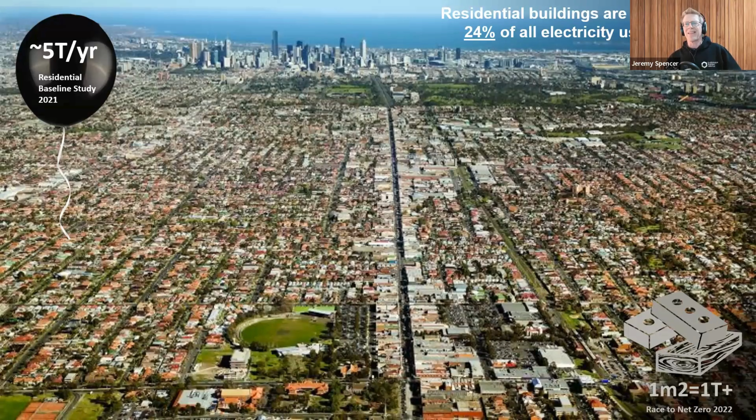All right. Apart from carbon, the other impact that our home has, it has a big impact on our electricity grid. How energy efficient the performance of the homes is has a big impact, because as you see there, residential buildings are responsible for 24% of all electricity used in Australia. That means how we build makes an impact on that percentage.

And remember that we're currently aiming for about 200,000 new residences every year. It's not quite reaching that at the moment, something like 170,000 or so, I believe, but that's what the government's aiming for. But that means within 5 or 6 years, we've added another 1 million homes. So that 24% is only likely to grow. And this at a time when we're trying to do this energy transition. We certainly don't want the next 1 million homes to be as high demand as the last 1 million homes.

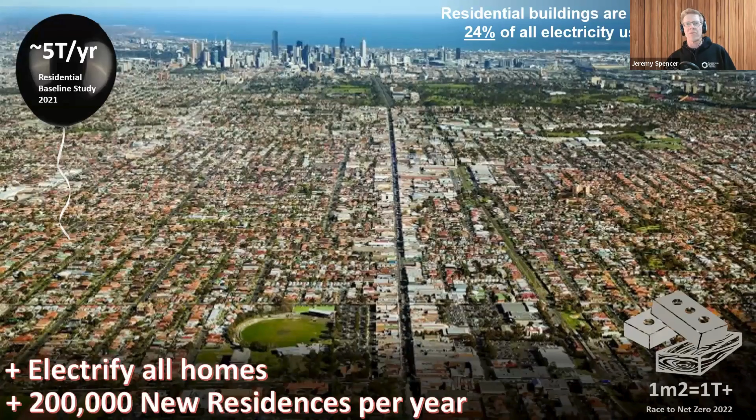Remember, we've got to provide infrastructure for this new green grid. And if we don't want it to cost an absolute bomb, we have to keep the demand down of what we're putting onto that infrastructure. And don't forget, not only for new homes, we're trying to electrify all homes. And this is coming in the next 10 years as the government pushes towards a 2035 target of 62% carbon reductions on 2005 levels. On top of all new homes, we're also trying to electrify all businesses.

On top of all businesses, we're trying to electrify all industry. On top of that, we're trying to electrify all transport. And we're doing this because if we can put these things onto an ever-greening grid, the carbon emissions of Australia go down if we can green that grid. So that's the logic to it.

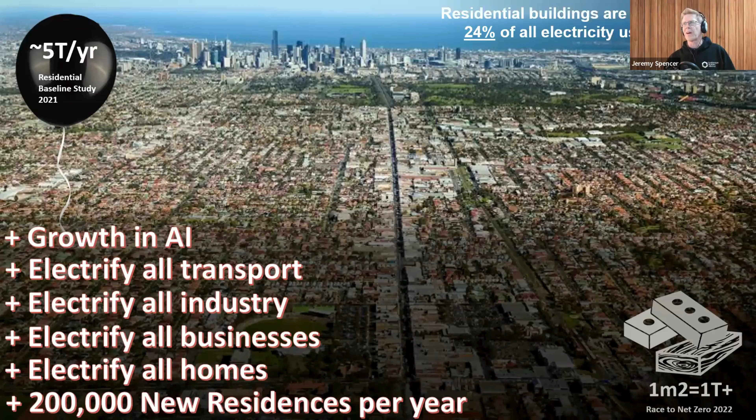And on top of that, of course, we now have AI. Already about 5% of our electricity use in Australia goes towards AI, and that's set to double by 2030. So there's a lot of pressure on this grid. This is already a grid under pressure, and we're trying to do this energy transition. So what I'm proposing is that our homes need to align with this ambition for Australia, and not only need to align with it, they need to not be a burden on the grid and support the energy transition.

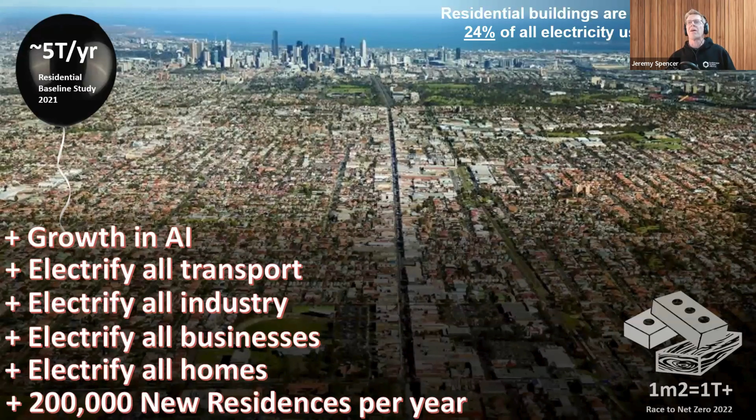Okay, this is also partly what the code is already trying to do, and there's a really useful document. If you haven't read it, it's called the Trajectory for Low Energy Buildings. That's the document that drives the energy efficiency measures in the National Construction Code, and it's the document that is responsible for us having 7 stars and whole of home in the NCC now.

I won't go through it completely, but this trajectory goes until 2030. There's actually a new Trajectory for Low Energy Buildings, an updated version, which you should also get and have a read. When you read that to see where sustainability is going over the next 10 years, you will see the words embodied carbon written a lot in that document. So just a heads up there.

But this current trajectory has 2030 as its endpoint, and by 2030, it's aiming that all buildings, residential and commercial, be zero energy and carbon ready. And if I just read out what that means, a zero energy and carbon ready building has an energy efficient thermal shell and appliances, has sufficiently low energy use, and has the relevant setup so they are ready to achieve net zero energy use and carbon if they are combined with renewable or decarbonised energy systems on-site or off-site.

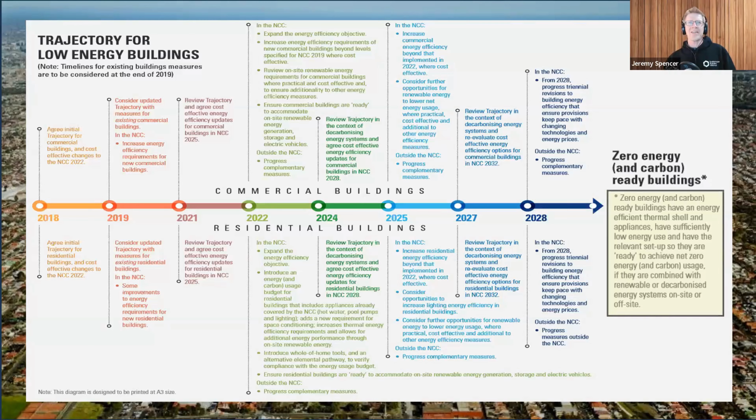So effectively, that's an energy efficient thermal shell, reasonably energy efficient appliances, such that if you put photovoltaics on the roof, you will get an annual net zero outcome. Now, I've been pushing for this for years, and I found it amazing when this got into the code. A lot of people were pushing hard for this, but I've now come to think that annual net zero has some issues and maybe isn't what we should be aiming for.

Let's have a look at what most net zero homes who achieve that annual net zero, producing as much power over the year as they use, are actually achieving. So here we have a graph of annual net zero. Hang on, I'm just going to move something that's on my screen out of the way.

This graph is for a 7-star home built to perform to that rating in Canberra with inefficient appliances and a 7 kilowatt PV system. You get a similar graph if it was a 7-star home maybe not built to 7 stars, maybe built to 6 or 5 stars with a mixture of efficient and inefficient appliances. You get a similar sort of outcome.

But if I just explain this graph, at the bottom you can see in that aqua blue is hot water. Under NatHERS that stays pretty constant all year, similar requirements all year round for hot water. Above that, we've got household appliances. These are plug-in loads, and NatHERS again just assumes that they stay pretty constant all year. Then in summer in Canberra, there's a little bit of cooling required. That's the blue there. And then you can see that there's quite a lot of heating required, and this is with inefficient heating as well.

This yellow line here is the solar being produced from the 7 kilowatt system on the roof. If I just colour that in, you'll see this is what people generally mean by annual net zero. They mean that the power that's produced by your solar over the year, if you add all that area under the curve, is pretty similar to that area of demand that the house needs. Once you get those the same, effectively, you get annual net zero.

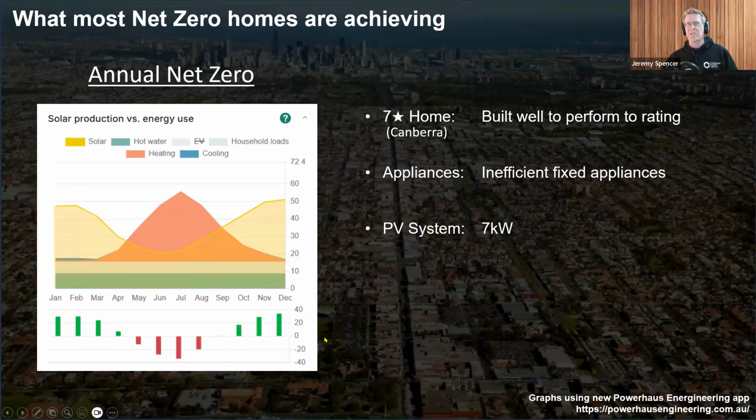What's the problem with this? In warmer months, the house produces more power than it needs, but only during the day when sellback prices are very marginal. Hot water and household loads remain high, and they're often on at night when demand is high and prices are high. So you're producing a lot of power, but you're not getting much financial return typically for it. And you're still drawing power at night.

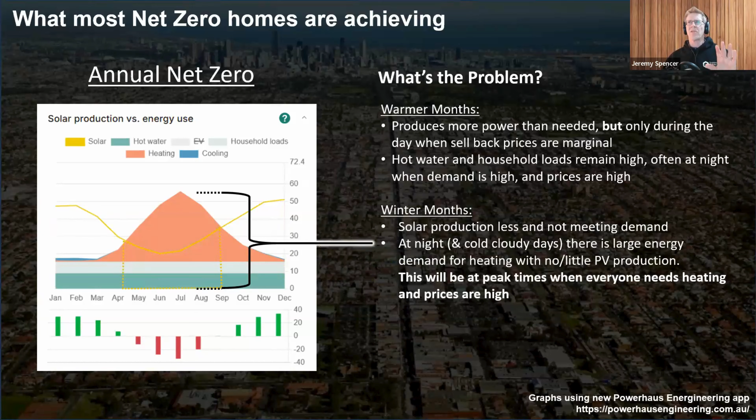Winter months. Solar production is less and not meeting demand when you need it. At night and on cloudy days, there's a large demand for heating and little or no PV production. This will be at peak times when everyone needs the heating and the prices are high. So what does this lead to? Even though you've achieved annual net zero, the house is still expensive to run. You're drawing most of the energy that you need at peak times when those prices are high.

And even if this house had a battery, that would be pretty useful for those summer months. But this house is not making enough power in winter when it really needs it to fill that battery. That is, its demand is outstripping the solar resource.

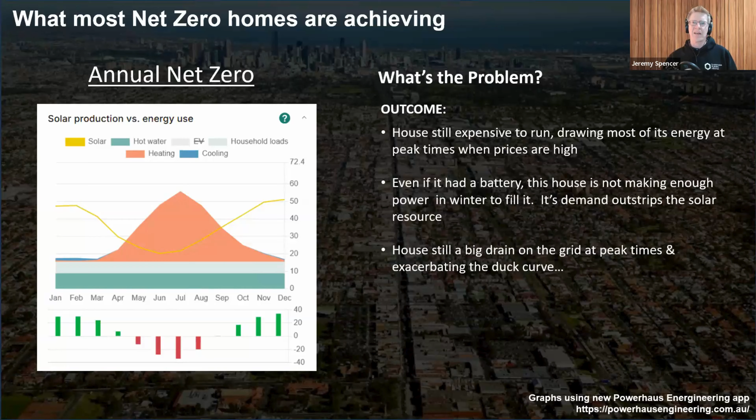And such a house, even though it's net zero, even though it's better than a standard home, it's still a big drain on the grid at peak times and is exacerbating the duck curve. What is the duck curve?

In the morning, people wake up, no sun shining, it's dark, or at least it is for builders when they wake up. Turn on the appliances, maybe have a shower, cook breakfast. You get this high demand spike early in the day. People go off to work, sun comes out, a lot of renewables come into the grid, fossil fuels back off a little bit, and the price goes down because there's often a lot more power in the grid than is needed. It really drives those prices low.

And one thing you have to know about the national electricity market is it likes to try and have even prices, unlike these big ups and downs. In fact, prices can potentially become negative, and that is bad for the stability of the grid, which is why if you're now putting in solar panels in Victoria, at least where I work, they will have a curtailment ability on them so that utility providers can turn off the power going into the grid if it's becoming a little bit unstable.

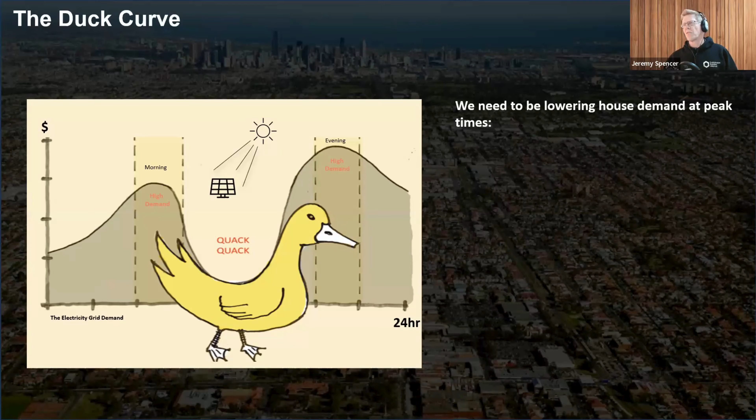So to lower demand at peak times, we need to do these things. Minimize heating and cooling loads by focusing on good design and good construction. So we are back to a shell first sort of idea here. Choose efficient appliances, cut that inherent demand of the house so it's not adding too much at those high demand periods. Then we need to make use of this resource of all this sunshine and shift what we can to midday hours.

So hot water would be one. Hot water uses a lot of energy. Let's try and make that hot water in the middle of the day when we have all these renewables in the grid and the carbon intensity of it is very low. Of course, if you have solar on your roof, you'll be producing a lot of power in the middle of the day typically, especially in those summer months. Let's put it into hot water.

When you get an electric vehicle, or even when you're building new homes, you should be setting up now for EVs. When owners get them, they can put them onto the middle of the day, again, to soak up that energy resource there. Pool pumps, if you've got a pool, make sure it's got a timer on it to work in the middle of the day. Appliances as well. You can talk to owners potentially about considering when the sun is out, that's the time to do the washing or wash the dishes or so forth.

Once you've minimized demand, load shifted things to the middle of the day, then the next step would be to put in batteries. And the idea of putting in batteries is to get this solar resource from the middle and start shifting it to those high demand periods. So of course, a house battery, and most of you will be familiar that there's a federal 30% rebate or 33% rebate, I think, on batteries at the moment. So a house battery is good.

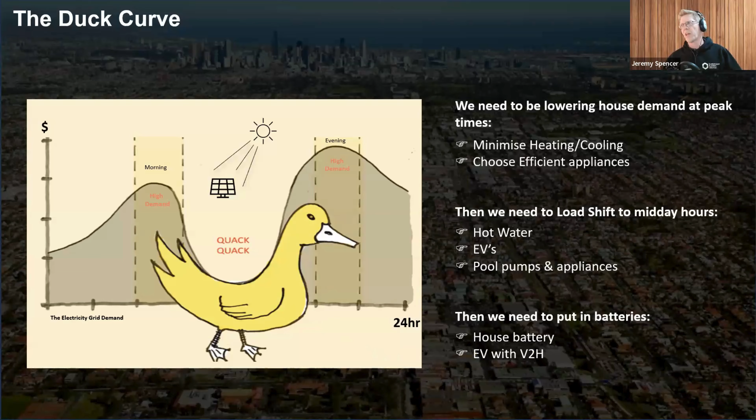EVs with vehicle to house technology will be coming within the next 5 years. The protocols are already set. Some of them are already starting to hit the market. That's where your car effectively becomes the house battery at night. Car batteries are typically at least 3 times bigger than the normal house batteries you see on the side of the wall, than your Teslas and so forth.

And for the government, I'd like to see them making more use of this resource, bringing on local and regional storage batteries that can then supply those high demand periods later on. And in particular, I think this is a no-brainer idea: make EV charging very cheap, if not free, in the middle of the day. It will promote more EVs being sold. People can then charge their cars in the middle of the day, come home, plug them into their houses, and run their houses at night. That's where I'd hope things could potentially go.

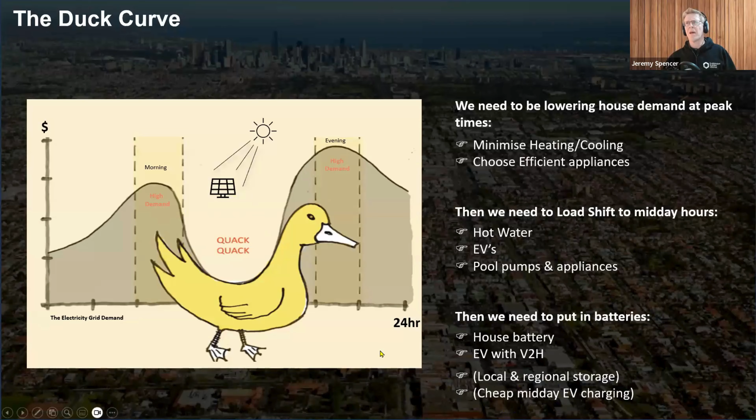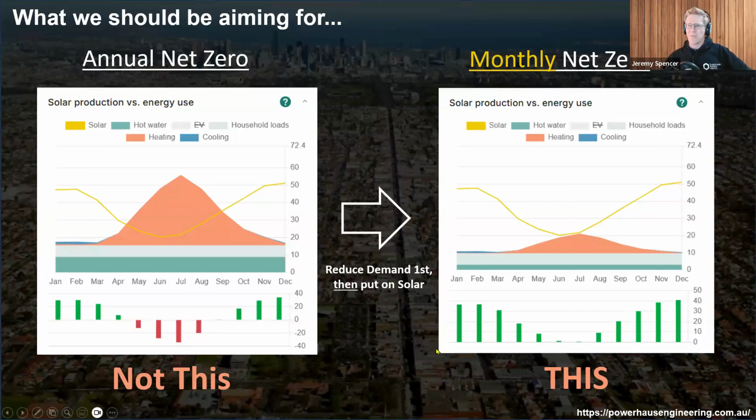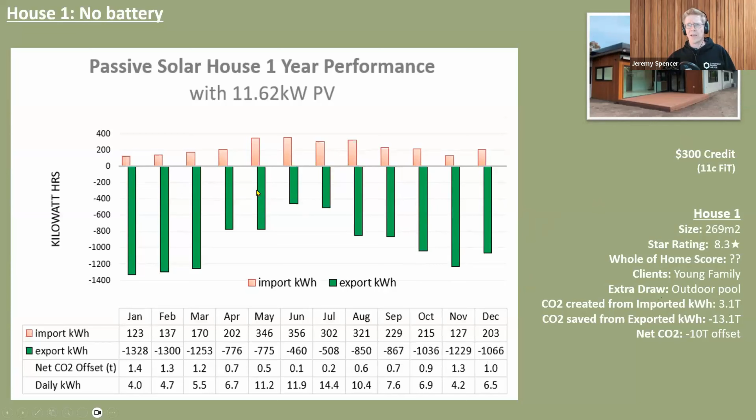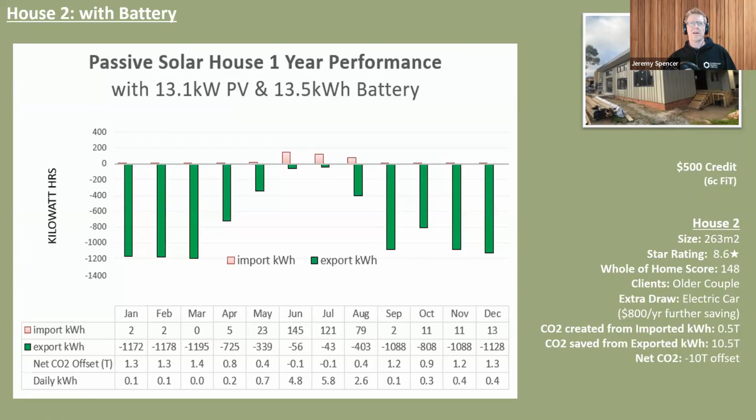But why is this good? It's good because when you combine it with battery, you get something like this. Here's another house. This one's $500 in credit, slightly bigger PV system, similar floor plan, similar house size to the other one. This one has an elderly couple. They spend most of their time during the day in the house. Their extra draw is an electric car, so they charge the electric car. So not only are they $500 in credit each year, but they're also another $800 ahead from charging their car at home instead of buying petrol for it. And the house is all electric, so there's another $300 ahead from not having a gas meter connected on the home.

But I just want to point out a couple of items about this house. For those people who've seen the webinar about this house, I have shown this before, but I think it's important. You can see here above the line, for most months of the year, there's effectively no power draw at all, extremely low demand. You could have another million of these homes on the grid and you'd hardly have to change any infrastructure because they've got extremely low demand. So I'm calling this a very resilient home.

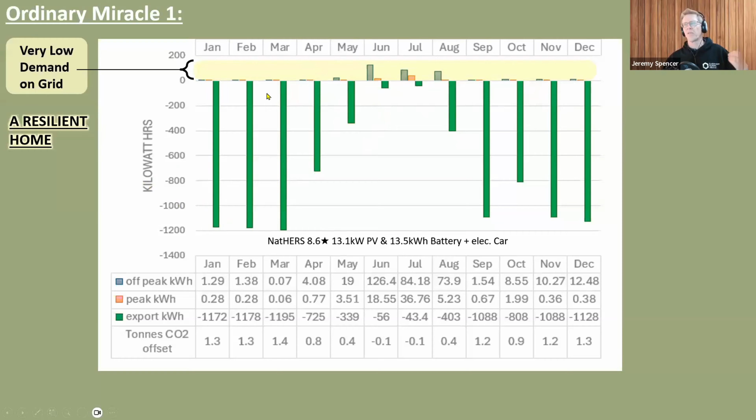Why is it resilient? It's resilient because if there's a blackout, this house could go days, weeks, potentially months at a time offline. Potentially the whole year if the owners manage the middle of the year period a little bit, because it's drawing a little bit more than it's producing there, but not very much. So you get these really resilient outcomes, assuming you choose a photovoltaic system with islanding on it and the battery.

These green lines show all the power that's being sent out to the grid, and it translates to enough power for 2 equivalent performance homes. And this power is being sent to the grid not only during the day when it's being made, but it's also being sent to the grid by the batteries at night, and could be set up to send at those peak periods to support the grid at those high demand times, to give more resilience to the whole grid infrastructure.

And you can imagine as well that if this house was in the country somewhere, and God forbid there was a fire, forest fire, and hopefully if this house didn't get burnt down, potentially this house could be supplying power with power cords to neighbouring homes, charging electric vehicles and pumps and different odds and ends. So this was also an energy hub, this house that has gone on the grid. As I said, these are real figures.

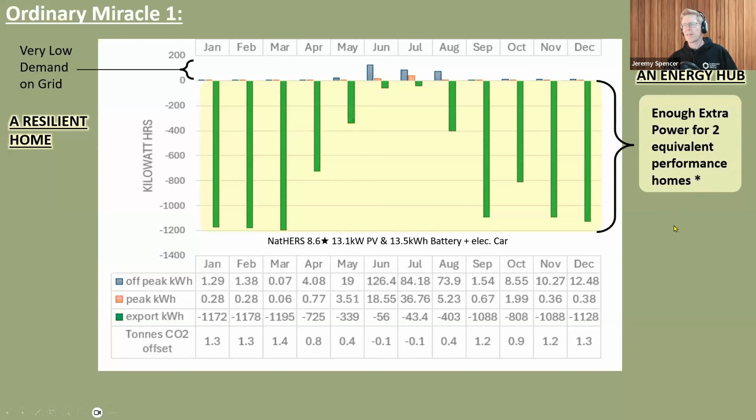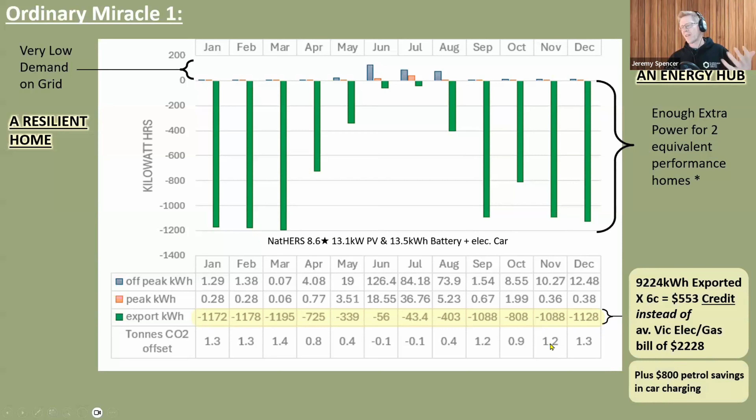This house exported over that 12-month period 9,224 kilowatt hours. That's how it gained its credit instead of paying the average dual fuel bill for a Victorian home, 2,228. Like I said, it's $800 of saving in petrol, another $300 for not having gas. So this is a low cost living lifestyle if you get a monthly net zero outcome plus a battery.

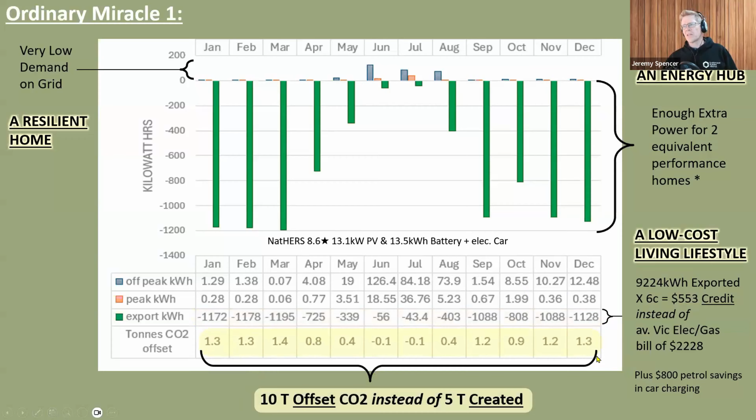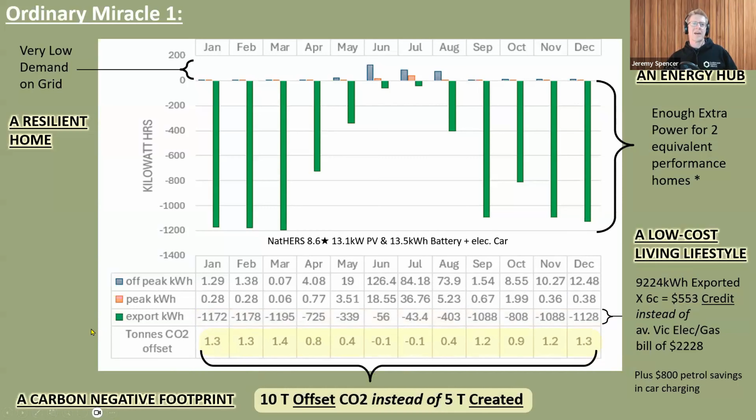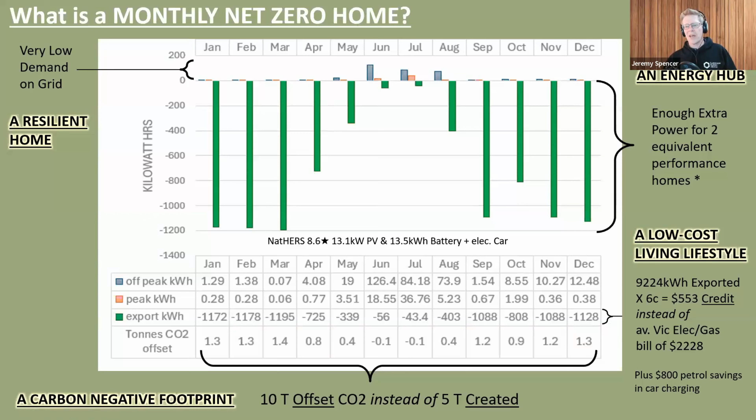And all those kilowatt hours that are sent to the grid offset the need for fossil fuels to be burnt to provide that power, and that saves 10 tonnes of carbon going into the atmosphere instead of the average of creating 5 tonnes. So you get a carbon negative footprint. So when people ask me what is a monthly net zero home, I say it's a resilient home, it's an energy hub, low cost living lifestyle, a carbon negative footprint, and something that helps with the green transition, a grid-friendly home, let's call it that.

If you want to know more about that particular home, you can go to our webinar resource. We're now up to our 41st webinar for SBA, and you can find just about all of them here. And if you click on that one, you can find out what made that house tick. There's also a part 2 that looks at the embodied carbon. This was a true zero home, which also accounts for embodied carbon.

All right, how do we achieve monthly net zero outcomes? So what do you need to know to achieve those sorts of outcomes? Well, the good news is all the information resides on the Sustainable Builders Alliance website. You click on the roadmap tab and you'll see that there's 5 different steps on the roadmap to achieving net zero and true zero outcomes. And those 5 steps are: good design is step number 1. Design a home that in the first instance doesn't need much energy to heat and cool, because the climate does it for it with the good design.

Step 2, low impact material selection. Build the house with lower carbon, more sustainable materials. Step 3, performance construction. Build it on the ground to perform to its energy rating. Step 4 is efficient appliance selection. Fit it with efficient hot water, heating, lighting, cooking, and appliances, so that it has minimal demand. And the last step then is energy generation and offsetting. Provide enough on-site energy generation for net zero and true zero outcomes. So that's the 5 steps to a true zero carbon home.

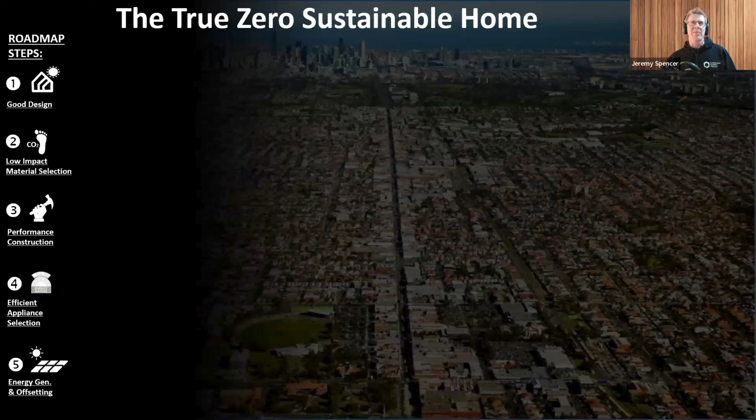In this talk, like I said, we're just talking about operational energy. So we're just going to talk about net zero sustainable outcomes. And what I want to do now is just give you that overview, that high vision look at how to actually achieve this, and then some pointers and some guides on what you need to know and where those resources are so that you can get up to speed quickly and start producing homes that do exactly this. By the way, when I'm talking about net zero from here, I'm really talking about monthly net zero.

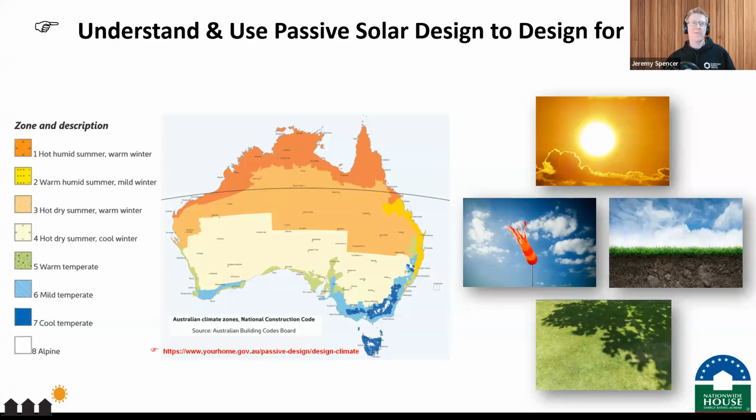All right, now what does the designer who's doing the design for the house need to know? Well, simply they need to understand and be able to use passive solar design. These are age-old principles that people have been working with for thousands of years to basically allow the climate to do the heavy lifting in keeping the temperatures comfortable inside a home.

How to find out what the passive solar principles are? If you click on good design, you will go to step 1, and step 1 lists out the 5 rules of passive solar design. If you click on each one of those, you can read through practical information of what the rules are and how to apply them on builds. Wherever you are in Australia, there's different strategies, obviously, for tropical versus cooler regions.

Now, one thing that I want to point out here, if you haven't already looked at it, is the 7-star plus cheat sheet. That's a free resource to download. And some of you may not realize, but as well as a builder, I'm a long-time thermal performance assessor. I've rated literally over 1,000 buildings over my last 20 years. Some of them are mine, most of them aren't. And I've also spoken with a lot of raters over that time and good friends around Australia.

So what I've done in this cheat sheet is basically put down all the learnings under the 5 different principles of passive solar design, of things to check on your plans. And this is a really good way to assess whether the plans you're doing are on track. But also, if you're not all that familiar with passive solar design, it's a really good way to get up to speed. Read through it. Anything that you're not sure about, there's actually links in this document back to the right part of the website, to have a read and gain that understanding. So a useful resource for getting up and running on how to achieve 7 and beyond.

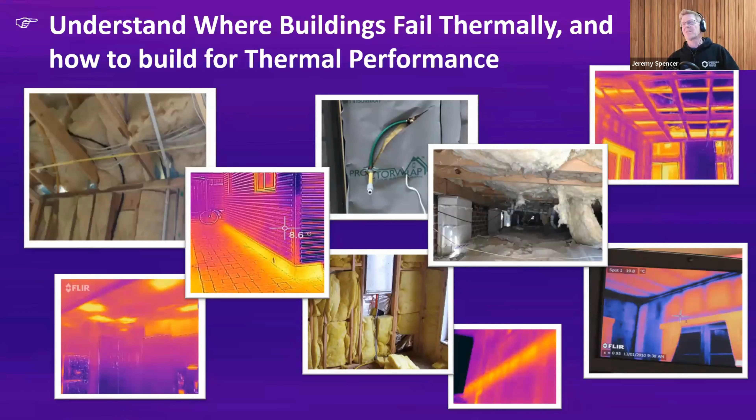Step 3 of the SBA website goes through what you need to know, what the assumptions are and what you're actually aiming for. It also has a lot of information about condensation and mold in performance construction, which is a hot topic at the moment. So that'll give you a good background on the theory and practice of minimizing condensation and mold, and also a discussion of different strategies for healthy indoor air quality.

But this is what I want to point out. It's the builder's thermal performance checklist. This goes through all the areas in standard construction where it commonly fails. Those are the pitfalls. And then it has 2 strategies. One, particularly for designers, are things that you can do to design out issues from the start in the design so they don't come up. And then for builders, it's got control measures for each of those pitfalls, and it's got pictures and explains what's going on in the picture. These are control measures so the builder can check things on site and control them before moving on to the next stage of the build.

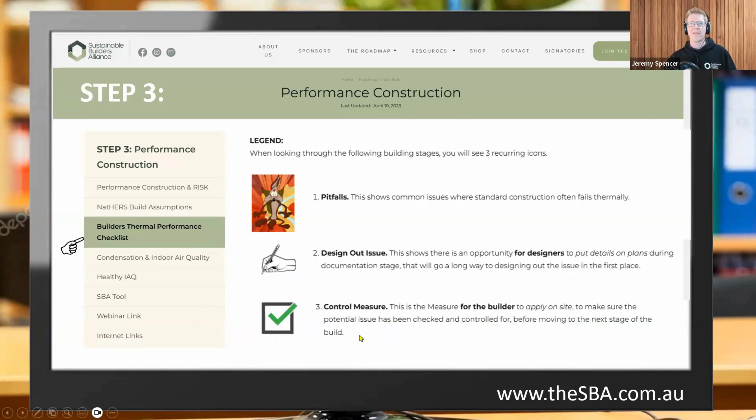To go with this information, there is an SBA tool that is free to download, free to the industry. And this, I think, is a really useful document. For builders, as we're moving into a period of high performance construction, especially if we're promising net zero and true zero sort of outcomes, it's important that we have a strategy so we can ensure the thermal quality of our builds time and time again. And that's where a QA checklist really comes into its own. It also acts as a bit of a risk management tool in that you can show all the things that you did on the build to achieve the performance outcome.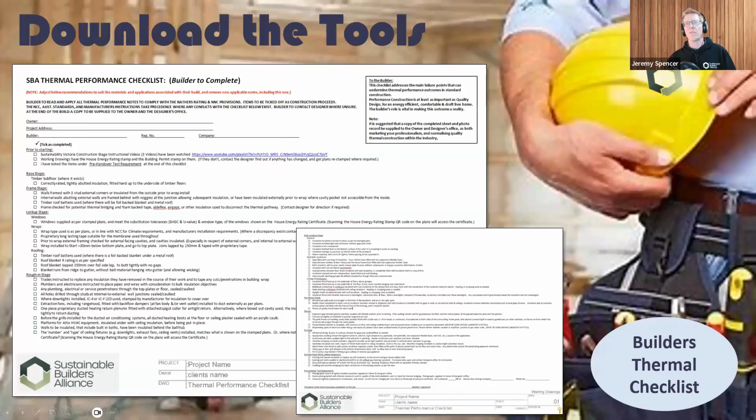You can give it to your project manager, someone on site, and it's really just simple little things to check at each stage of construction, because with standard construction, if you miss things early on, if you don't get the insulation right before the plaster goes on, well, you've missed your opportunity. If you don't caulk the plaster before the cabinetry goes on, you can never get to those gaps and cracks. This will help make it more likely that the builder and the team on site will be able to control for potential issues.

And if you're wanting a builder who knows this stuff, or a designer who knows how to do climatic design, good design, or you're wanting an assessor or a trade who is on board and talking the same language, we have now introduced something called the Sustainable Builders Directory. So you can go and look up members who are on that. And if you're a builder looking for a high performance designer to link up with, because you're interested in building high performance homes, you can find them there. If you're a designer looking for builders who can actually build your home to perform, to meet that vision that you had in your head and that the energy rating said, you can find that builder or that trade or that assessor here. You can build up your green team. Of course, if you're a homeowner looking to put together a group of practitioners who are all on the same page and can work together, again, this is a good place to come.

When you do come to this page, there's a number of filters, but just look for these badges. These badges are our sort of quality control measure, if you like. There is one badge for each of the steps under the roadmap to net zero homes. To get one, you have to learn and understand the material that's on the website and do an accreditation that shows that you've interacted with it and understand it. So yeah, look out for those badges. It just sort of sets a bar to keep out people who might want to be on here for greenwash reasons. And you can become a member and list yourself up there as well.

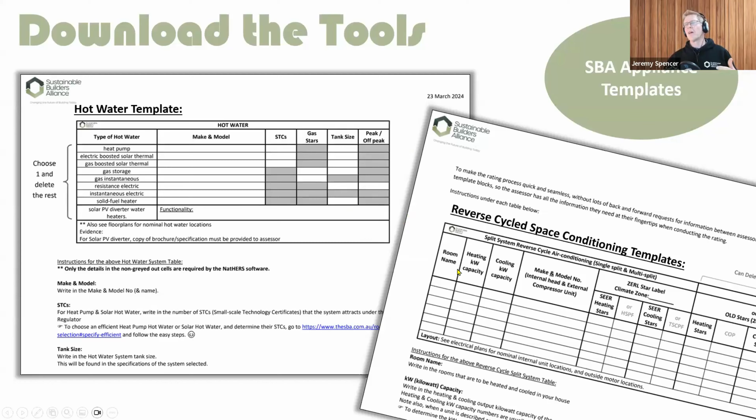Importantly too, these templates also have steps on how to choose more efficient versions, what you need to know if you need to size things up, and any other information you need to fill in the tables. And then you can put them on your plans. Your assessor will love you.

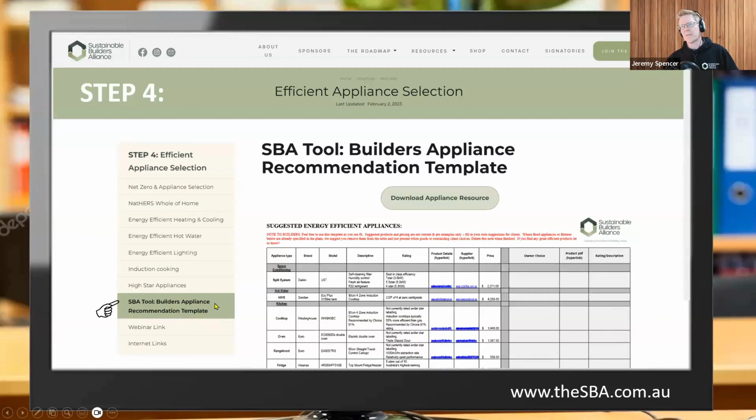Another tool on this page is the SBA Builders Appliance Recommendation template. And this is just some useful information that you can give to clients if they're the ones selecting the appliances. And it just simply tells them the importance of the white goods that they'll be selecting. And importantly, it has worst and best performance of each of the major items that they'll probably be wanting to buy.

It's important that when you go shopping, you know all these stars are different. They don't all go up to 5 stars. They go up to different amounts of stars depending on the item. And if you go off shopping and you buy a 5-star dryer, you might think you're doing well, but you're not doing well because they actually go up to 10 stars. And it also gives the indicative savings over a 10-year period.

So this is just something that helps guide owners to think, oh, maybe I'll choose a more efficient version if it's in my price range. And that can help give that extra little bit of headroom, as I spoke before.

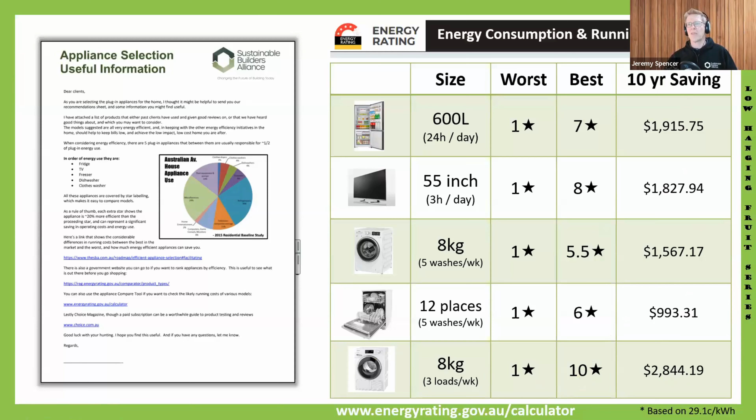All right, so look what we've done here. We've gone around that pie, we've minimized the demand, and importantly, what we haven't compromised on is function. We still have all the exact same function. What we don't have is the cost. It's a lot cheaper to run this house now, and this house is not emitting as much carbon dioxide because it doesn't use as much energy or draw it from the grid.

So the next step is energy generation and offsetting, now that you've minimized the fundamental demand of the home. And here we're talking about solar PV systems. Now, how much do you need to put on if you want to have this monthly net zero outcome? Well, I'll give you a rule of thumb in a second, but of course you should be asking your thermal performance assessor: I want a monthly net zero outcome. How much solar should I be putting on?

If their tool can't do it, they can always talk to the Powerhouse app people and start potentially using that tool too. Though I know at least one of the NatHERS tools also has that functionality where you can get it out. But here's some rules of thumb.

For my own homes in Victoria, this is what I'm finding. Once you take this approach and minimize demand, most standard size 200 to 300 square meter homes, somewhere around 6 kilowatts, and you start to break even on that monthly net zero, start approaching that monthly net zero.

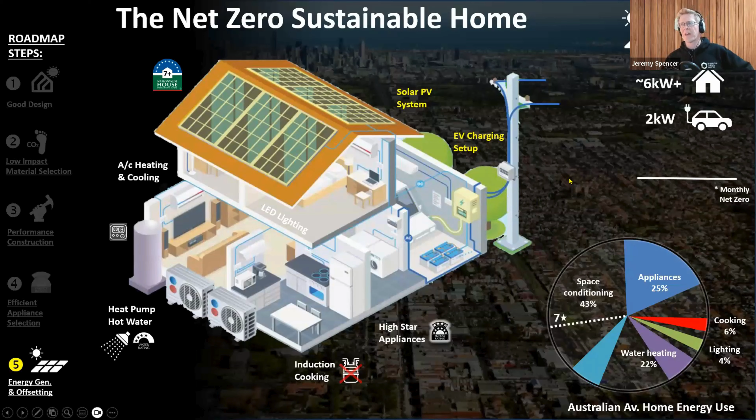To power an EV and run it for 50 kilometers or so every day, if you set aside 2 kilowatts of power, that will be enough to run most EVs around about 50 kilometers, which is the average city driving. If your owners do have an EV, also remind them to try and charge as much as possible during the day. That's the load shifting aspect.

Lastly, personally, I also like to calculate embodied carbon, try and minimize that, and put on an extra couple of kilowatts to pay back the embodied carbon debt of the home over time. If you do it all right, you'll find that you can pay that back within the lifetime of a single system. The other thing I like about putting on an extra 2 kilowatts, again, it's that headroom. So if you've had a particularly cold, dark winter month, you've got a little bit of extra headroom up your sleeve, so the house still keeps performing.

So that gives us a 10 kilowatt plus sort of PV size. Now that sounds like a big system size, and it was a big system size until recently. Now the average size is 9 kilowatts. So this is sort of what's going on most roofs anyway.

If you do this, you'll achieve this monthly net zero outcome. But I've got these wedges see-through now because you'll be producing more power than you need over a 24-hour period. But because you don't yet have batteries in the system, at night time, you're still going to be drawing from the grid.

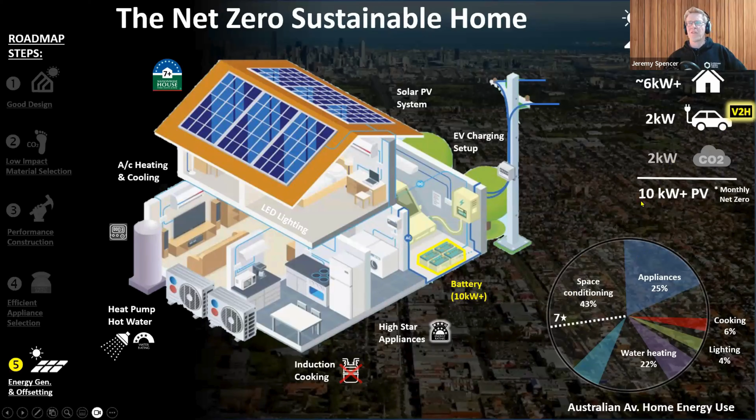And so the next step, of course, is to add batteries once you've got this monthly net zero outcome. And that can be a battery bank. I suggest at least 10 kilowatts, which will be enough to take most homes, especially these energy efficient homes, easily through a night or two. And also consider in the future, if not now, some cars are already out there which you can plug your house into. So look out for V2H coming in the next 5 years down the line.

Once you put on that battery, then you have these amazing outcomes of basically drawing nothing from the grid or very little, but it's still there. The grid's still there as backup on bad days or when you have parties and lots of people around. So it's good to still be connected. It's also good to be connected because you're sending a lot more power to the grid, and you can feed the grid through your batteries at those high demand periods and actually help the grid be more resilient. So more of these homes on the grid actually enables a cheaper energy transition.

Lastly, what do you need to know about all this electronic stuff? Well, if you go to step 5, there's actually a section saying PV, what you need to know. And most of the information is there. Also, if you're planning for batteries, again, what you need to know and where batteries can and can't be located when you're doing the design. Important, especially for designers, to know that one.

The only tip that I'll give you is I'm finding now that we do most of our homes with 3-phase inverters. Our homes are now islanded, so the inverter's connected to the other circuits in the house. We put in car charging. There's also now the curtailment functionality, and all of these things require switch capacities and switches in your switchboard.

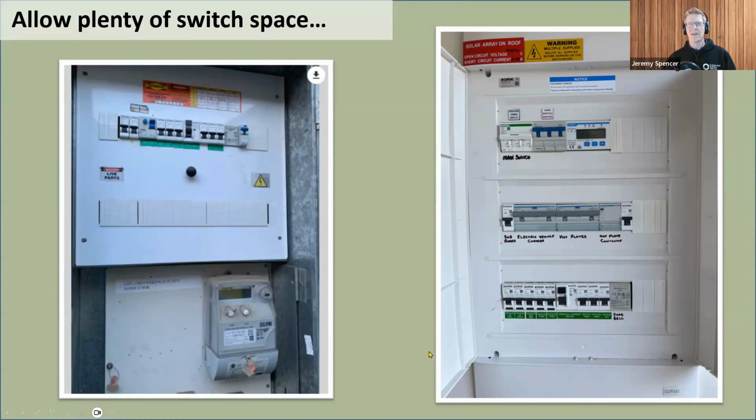So this one on the left here, if this is in your meter box, that is the very minimum. A 32 switch system would be the very minimum that I put on. Typically now we put a whole one on just for batteries and solar and car charging. All the stuff goes into there. So that's just a little bit of a tip, makes things easy. There's also a template to do with photovoltaics under step 5 there.

And so there you have it. This is the net zero home. This is sort of an overview. And as a very last overview, just to really pound this home, what we're doing here, in the first instance, we're trying to minimize demand through good design, high performance construction, and efficient appliance selection. Then, once we've minimized demand, putting on PV and load shifting. And then that'll give you that monthly net zero outcome, as you can see there.

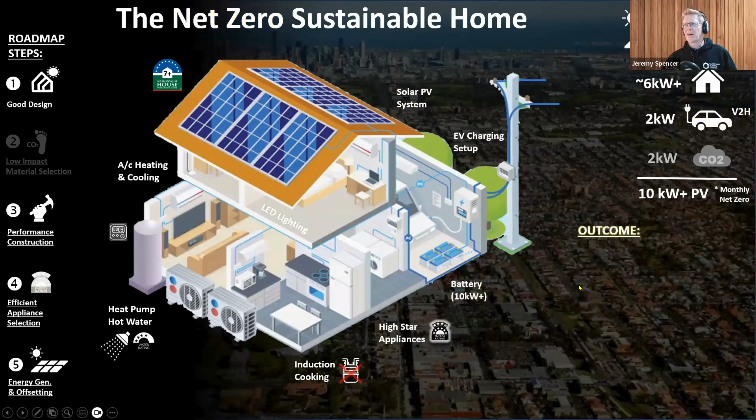Then adding batteries, which effectively makes the home net zero. And the outcome is a carbon negative footprint, a low cost living lifestyle, a resilient energy hub, and a grid friendly home. So that's it for the major part of the talk.

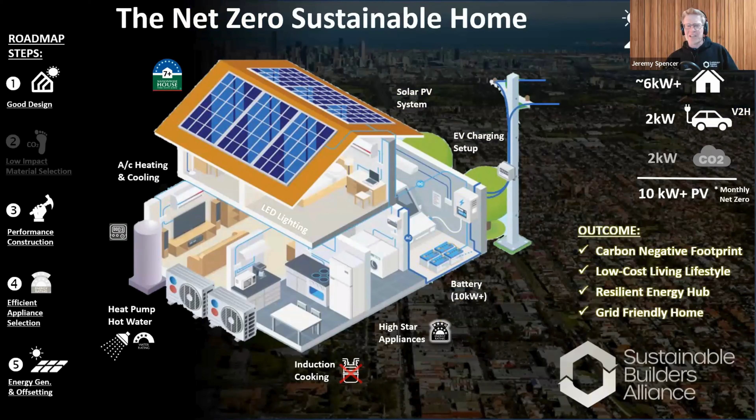And I hope that was 45 minutes, Ham, but I'm just going to steal one more minute if I can to